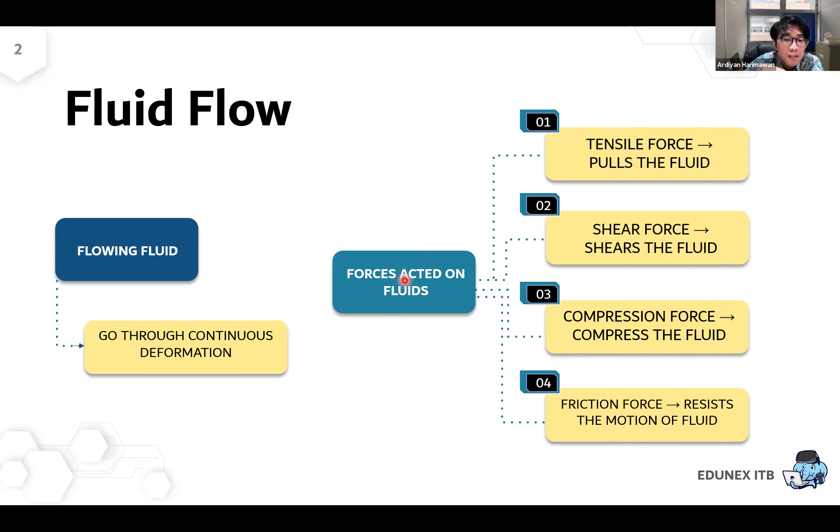For example, near the inside wall of the pipe, the fluid will give resistance - this resistance is called the friction force. So if these first three types of force cause the fluid to flow, the last type of force will resist the motion of the fluid. This is the types of forces that act on the fluid, causing continuous deformation.

Depending on the velocity, the fluid will undergo different types of flow, or flow regime - berdasarkan kecepatan akan ada yang namanya rejim aliran atau jenis aliran. The extreme one, the slowest one, because of very low velocity, the flow regime will be laminar flow. On the opposite, if the velocity is very, very high, the flow regime will be turbulent flow.

The characteristics of laminar and turbulent flow we have discussed in our previous class. And this is an important parameter that we will often encounter when dealing with fluid mechanics calculations - we call it Reynolds number.

Reynolds number is basically a ratio, a comparison - there will be no units for Reynolds number. It's the comparison between the inertial force, the force causing the fluid to flow - the higher the inertial force, the higher the continuous deformation - divided by the viscous force due to viscosity, which is the force that resists or goes against the fluid flow.

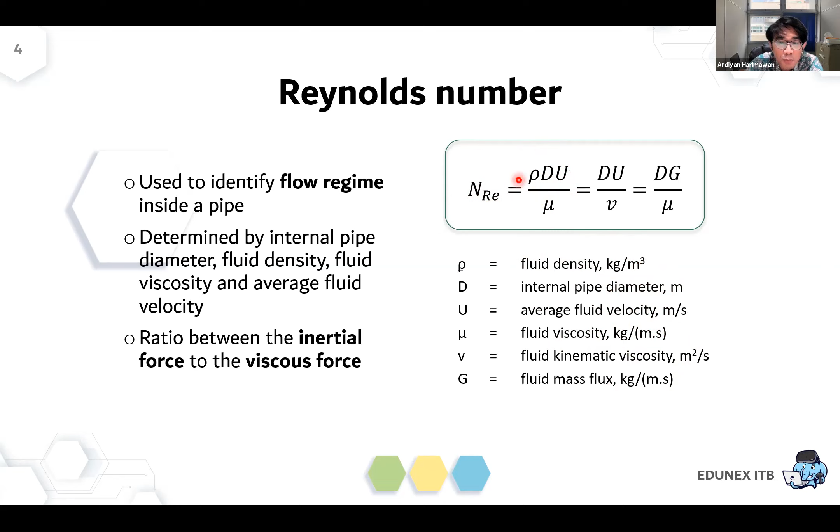By calculating the Reynolds number, we can classify the flow regime. If the Reynolds number is quite small, the flow regime will be laminar. Vice versa, if the Reynolds number is quite high, the flow regime will be turbulent, and in between we call it transition regime.

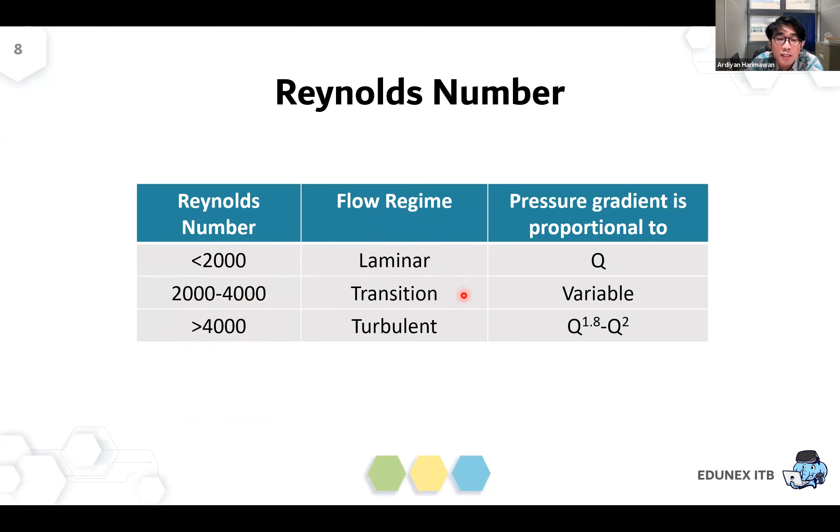Okay, we have discussed what is the application, but later we will discuss this further. On our previous class, we have also discussed, especially for liquid, that if the liquid is flowing in the pipeline, depending on the size of the pipeline and depending also on the velocity of the fluid, the volumetric flow rate, it might not fully fill the pipeline.

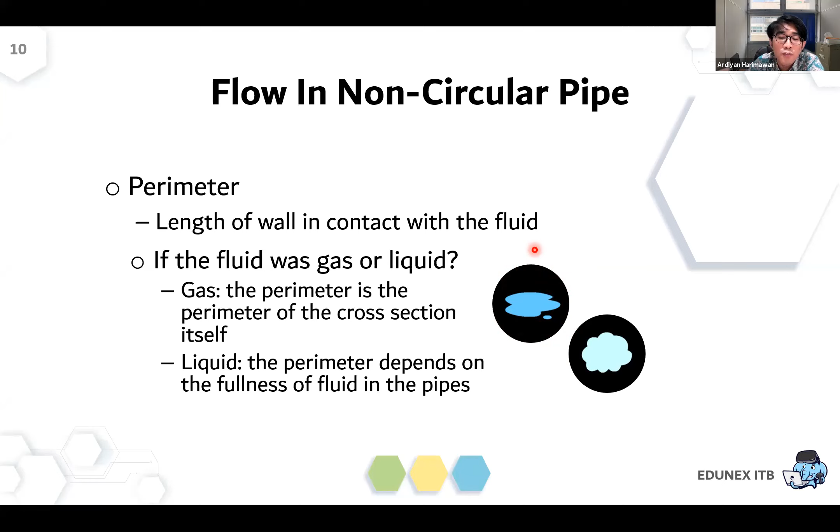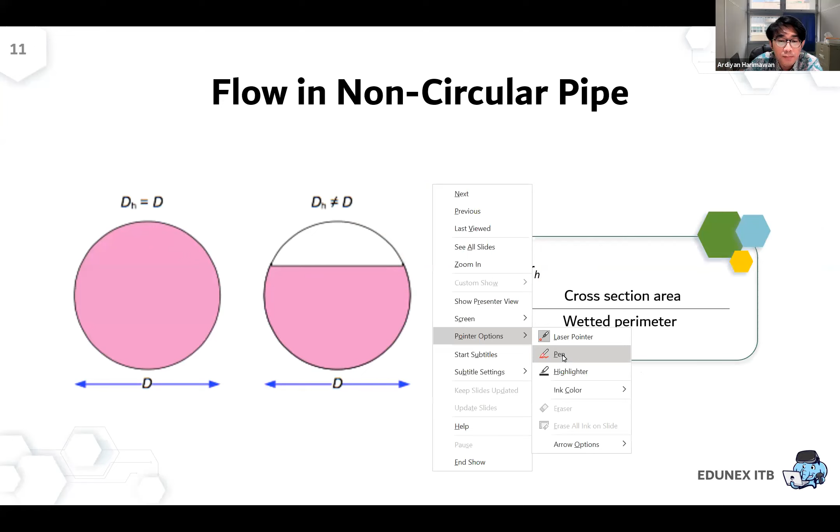So in the case when the fluid is not fully filling the pipeline, you need to determine what we call equivalent diameters or hydraulic diameters. It will be 4 times the hydraulic radius, a bit different from the concept of diameter and the correlation between diameter and radius you've known before, where diameter is simply 2 times radius. But for hydraulic diameter, it will be 4 times. And what will be the definition of hydraulic radius? It will be the cross-sectional area divided by the wetted perimeter.

The wetted perimeter is the part of the cross-section that will be in contact with the liquid.

It will depend on the cross-sectional shape of the pipeline and how much the liquid fills the pipeline.

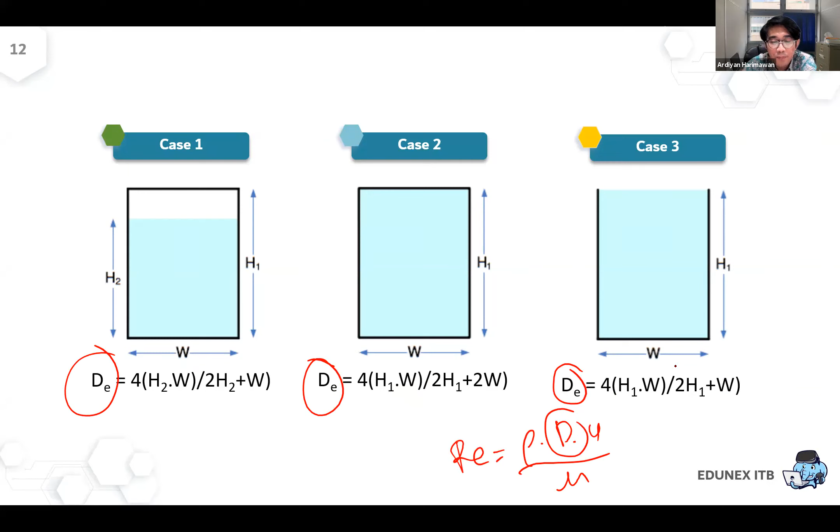Okay, previously I told about the wall thickness. So when you buy a pipe or tubing, a smaller pipe, namely tubing, basically the size is not something the equipment or the thing you customize by yourself.

During building a chemical plant, when you need to flow the liquid or gas, flow the raw materials, you need to buy a pipe, right? You need to install a piping system. And when you buy a pipe, it's not customized. It means certain types of materials will have certain standard pipe sizes.

So pipes in general, you don't just order by saying you want a pipe of a certain diameter and have it custom made. No. Based on the materials, depending on the materials, they will come in certain sizes, called the nominal pipe size. So when you buy a pipe, they will ask what size, 1.5, 2, or 3? That represents the nominal pipe size in inches. So the unit will be inches.

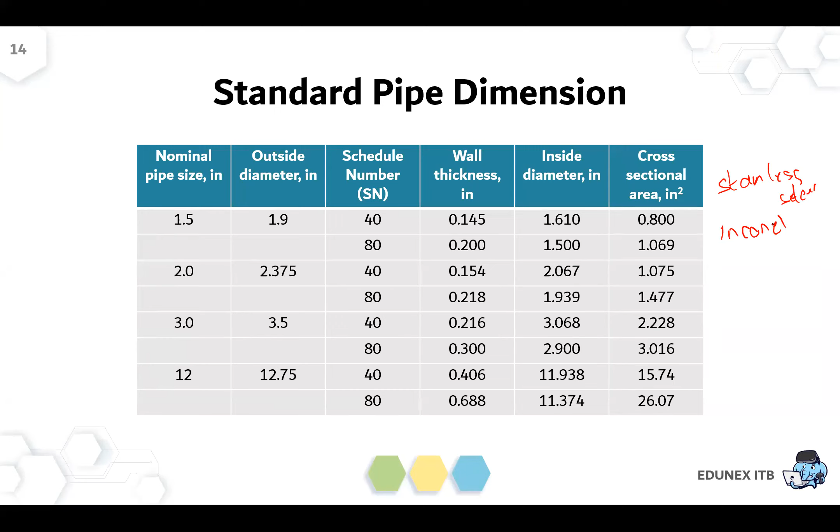Okay, besides that, maybe from other students, is it always made of metal? This is types of steel, right? PVC, sir? Yes, that's a common type of material, right? Polyvinyl chloride. And then it can also be made from concrete. Metals, yeah, it's not only steel, but sometimes it's made from copper as well.

So the outside diameters will depend on the nominal size and also on the material of the pipe. But the common rule is the higher the schedule number, the higher the wall thickness. It means it will have smaller inside diameters, and so on.

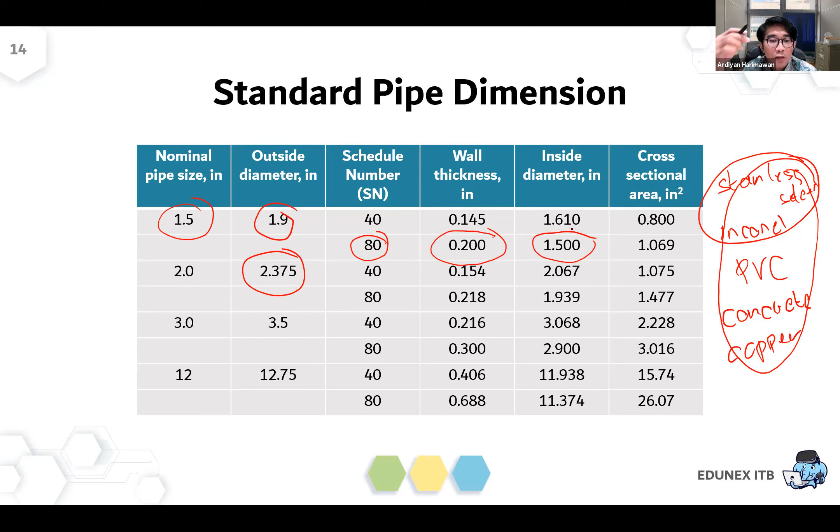You can find these tables from the handbook or the equipment or the pipe specification sheet.

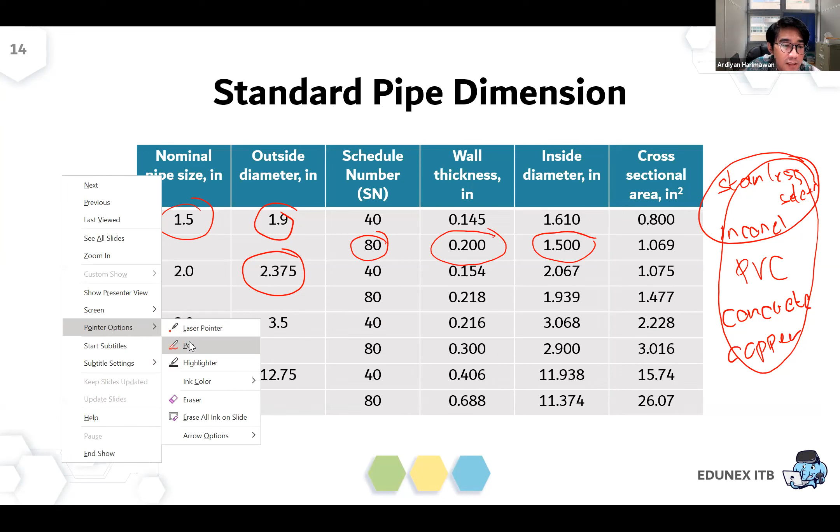This case is for carbon steel, right? Carbon steel or stainless steel will have different schedule numbers.

For each schedule number, you can check from this table how much is the wall thickness and how much will be the inside diameter. Don't forget to calculate inside diameter. If you only have the outside diameter and wall thickness, inside diameter will be outside diameter minus 2 times wall thickness.

Because it's diameter, not radius. So the inner diameter will be the outside diameter minus 2 times the thickness.

So inside diameter will be the value that you need to use to calculate the Reynolds number. In general, when you do the calculation of Reynolds number, you need the value of diameter, so this will be using the inside diameter.

Except for the case of the annulus that we discussed before, for the smaller tube, you need the value of outside diameter.

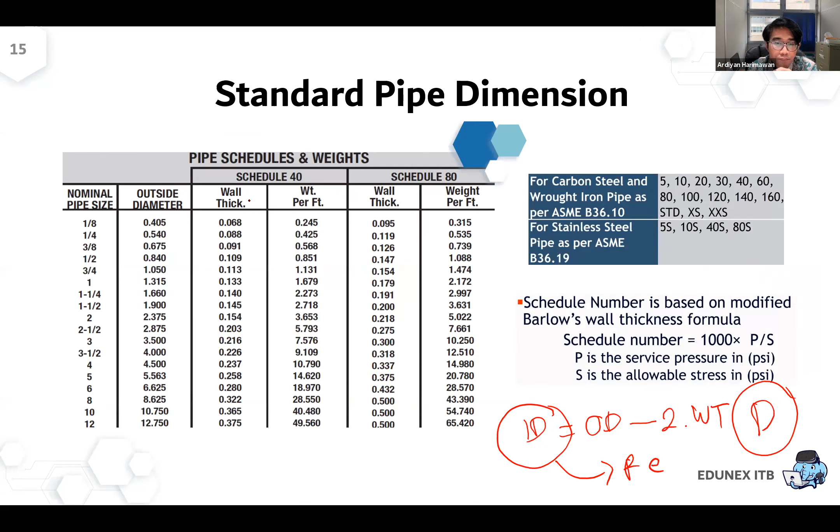Okay, then I will continue to the next part of the lecture, where we will discuss mass balance in fluid flow.

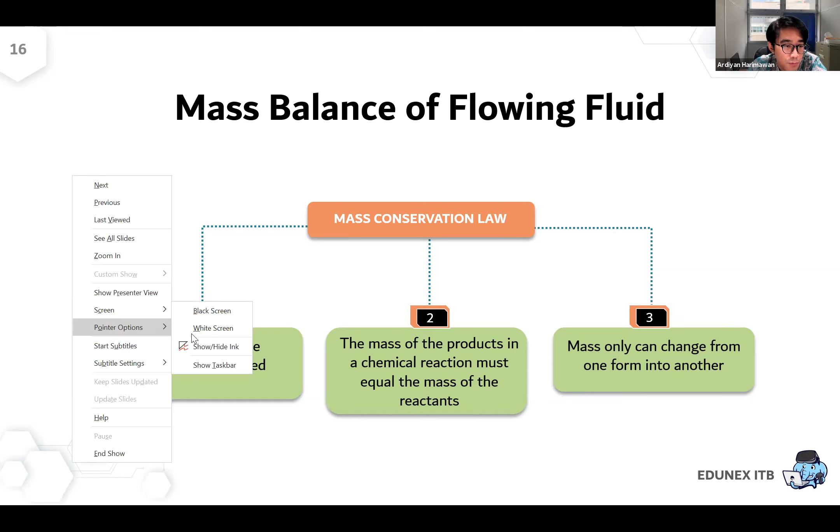I think you already, in third semester, study mass and energy balance, the same semester as fluid mechanics, right? So can you tell me the general equation of mass balance?

Is it input equals to output, sir? That's the very simplified one.

The general one, accumulation will be... anyone know?

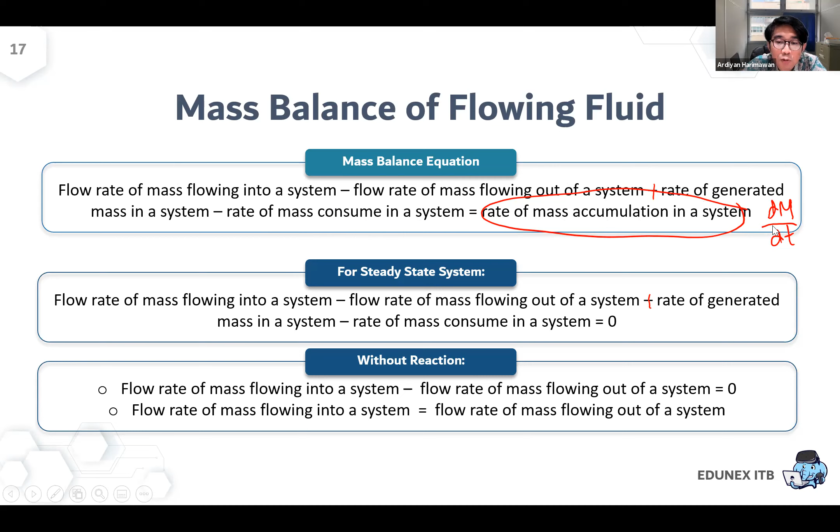The more ideal condition is called steady state. Have you learned this term in mass and energy balance class? Steady state? Have you or have you not?

I think, sir, maybe in another class too, not mass balance. I mean, in your class? I think you are all in the same class, right, in mass and energy balance. Yes, sir. Have you learned about steady state?

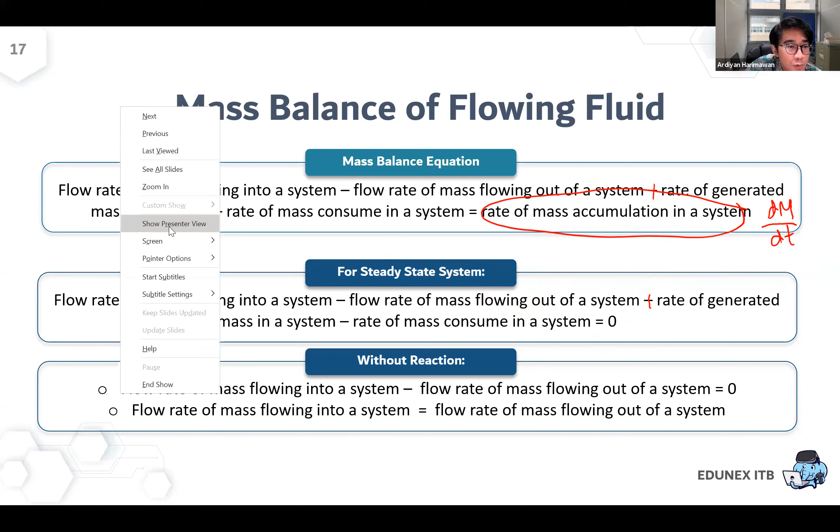So when there is no accumulation in the system, there is no dm over dt, we call it steady state system. Atau kita sebutnya tunak kalau bahasa Indonesia. Jadi kondisi steady state system means no accumulation. So the rate of accumulation will be 0. This one equals 0, we call it no accumulation. Steady state means no accumulation.

For the simpler case, to simplify it even more, the case of flowing fluid, there will be no reaction, right? If just water flowing inside the pipe, there will be no reaction. So it means rate of generated mass in the system will equal 0. And then rate of mass consumed in the system will equal 0 as well.

So the component of mass balance of flowing fluid is only flow rate of mass flowing into the system and flow rate of mass flowing out of the system. Ya, jadi di kasus fluida mengalir karena tidak ada reaksi, kemudian kondisinya dianggap steady state, tidak ada akumulasi, maka komponennya tinggal input dan output saja. And there, it will be equals 0. That's why input will be equals to output.

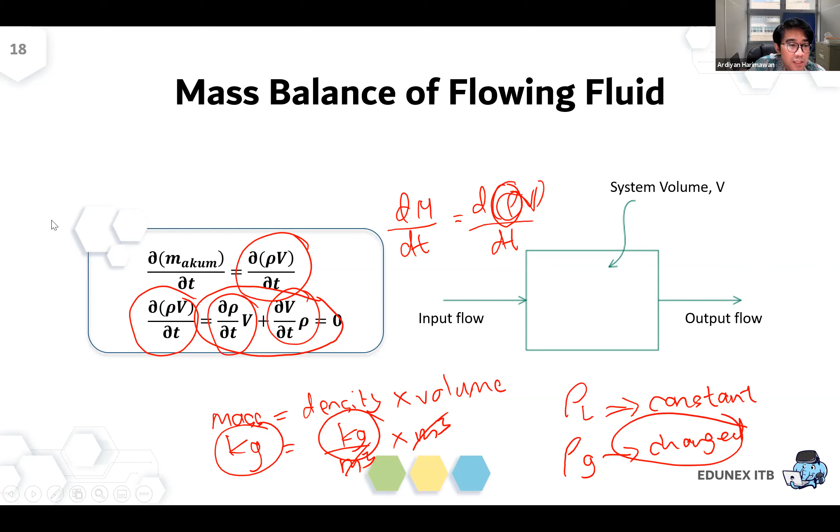And if the rate of accumulation is 0, ya, ketika akumulasinya sama dengan 0, ya, bagian ini sama dengan 0. Later, we will use this equation when we deal with compressible fluid. Gas is compressible, so the density is not constant. So we will deal with this equation more when we discuss about compressible fluid. But for liquid, the incompressible, just assume dm per dt, and then in steady state condition, it will be 0. Input will be the same as output.

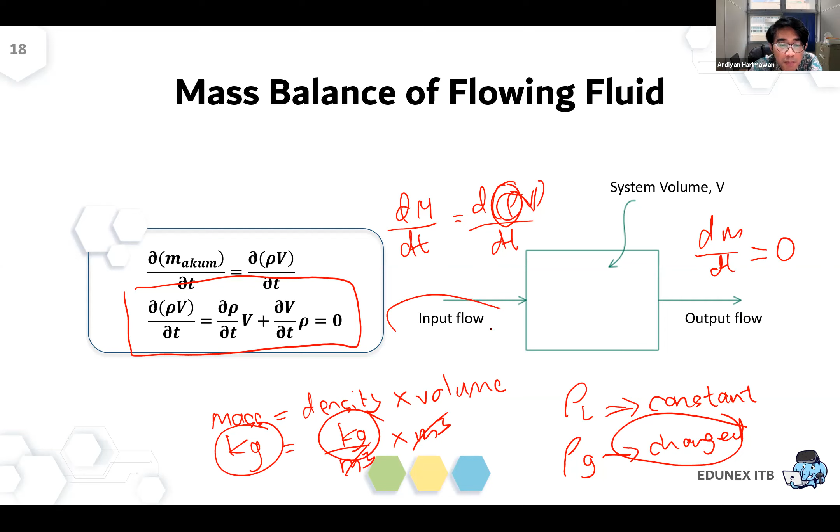Okay, so for example, liquid is flowing to the pipe with this kind of arrangement. This is the inlet cross-sectional area, A1, and this is the second one, the outlet, A2. So it will flow from point 1 and comes out from point 2. Based on the equation or the mass balance that we have discussed before, since the condition is steady state, input will be the same as output, right? So this is the steady state mass balance. The mass flow rate at the inlet will be the same as mass flow rate at the outlet.

Mass, tadi massa apa? Densitas kali volume. This one will be cross-sectional area times velocity. Ya, ini kilogram over cubic meters.

Sorry, this is cubic meters. This is cross-sectional area, U is linear velocity. So this one should be like this. This one is kilogram per second, and this one is cubic meter per second. So the equation becomes this one. In this equation, rho times A times U, the unit will be kilogram per second, or mass over time. As the input will be equal output, then this multiplication at point 1 will be the same as this multiplication at point 2. It will be constant, and we call it equation of continuity.

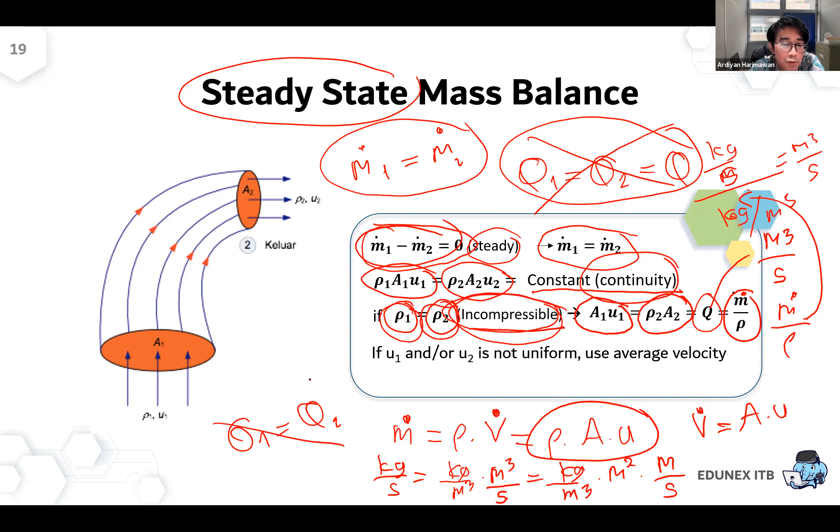Okay, I think this one is not. Don't be intimidated again with the equation. However, you need to understand that when the liquid or gas is flowing into the pipe arrangement, it might not have similar diameters. Then the pipe might not have the same height related to the baseline.

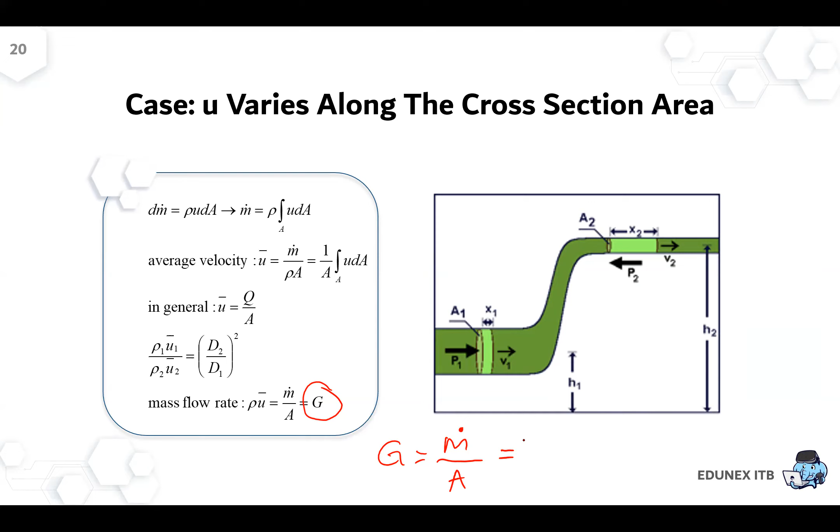Mass flow rate is expressed in kilograms per second. How about the area? Cross-sectional area, meter squared.

So sometimes mass flow rate is expressed in these parameters: mass over time over area. This one we call mass flux. Please try to memorize. Flux is basically flow rate.

Rate means, if you've heard terms like heart rate, flow rate, it depends on time, right? So mass flow rate, kilogram per second, divided by area, we call it mass flux. So this one is basically flux, mass flow rate divided by area.

It means mass flux will not always be constant, right? Because what's constant is mass per time, or mass itself - that will always be constant. But the area can be not constant. Because the area can be not constant, the velocity is not constant. Because area can be not constant, mass flux is also not constant.

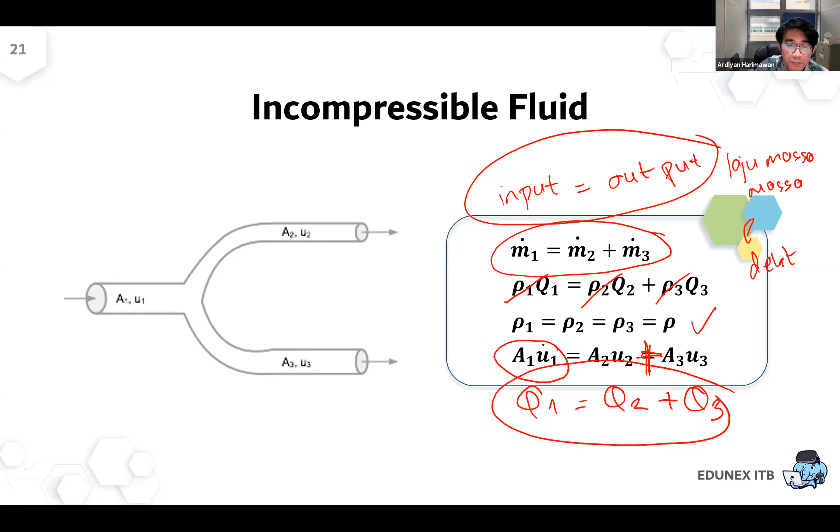Okay, I think we will have 5 minutes, 10 minutes exercise. Please check your slide, but I will make some corrections first.

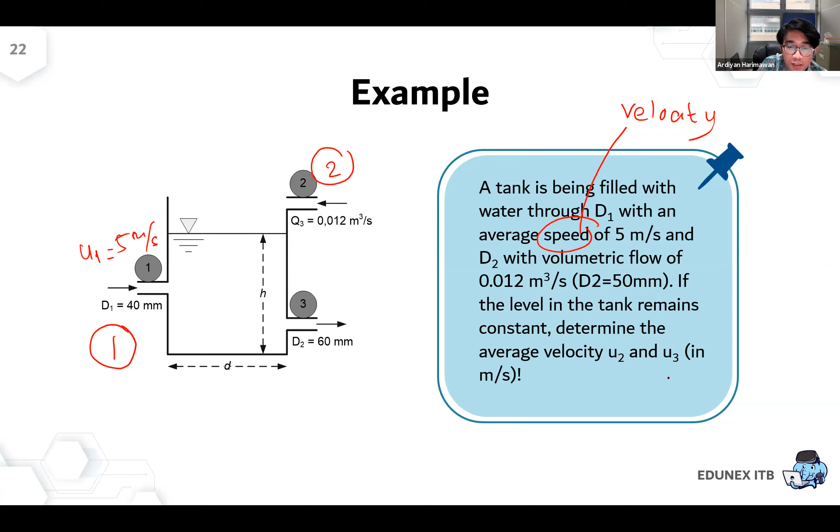So a tank is being filled with water through D1, here, with the average speed being the velocity. At this point, the velocity will be 5 meters per second. And D2, this one, with the volumetric flow rate 0.012 - so this is Q2.

And the diameter will be 50 millimeters. Okay, if the level in the tank remains constant - this one constant - please calculate the velocity at point 2, and this is D3, and the velocity at point 3.

What does it mean for the height to be constant? What is the meaning of the level in the tank remaining constant? Zero accumulation - zero accumulation, correct.

And then it will be achieved by relating these three flows. A student suggests constant rate. Yeah, can you speak louder please? Constant flow rate.

Constant flow rate? What do you mean by constant flow rate? Like it does not change, so it keeps being the same. Please rephrase again. So it's like it's going in at the same rate at different times.

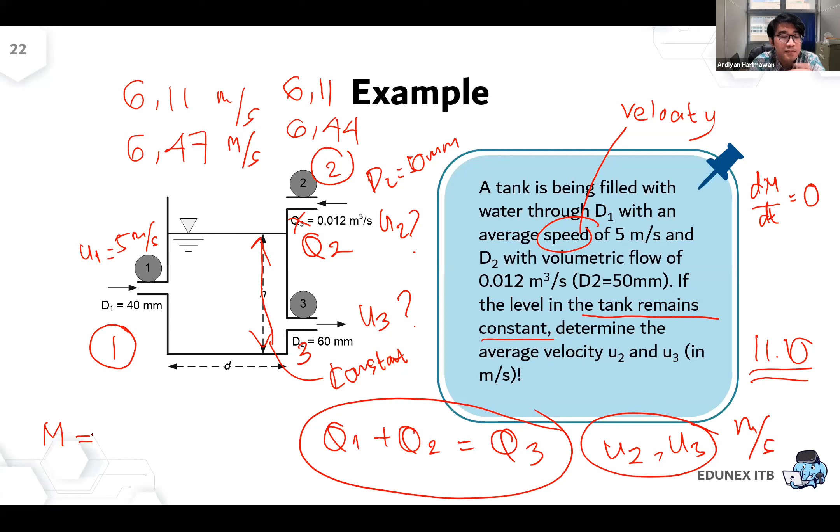What is m in this part? Mass. How to calculate mass if you have a tank? Should I ask?

Okay, who hasn't been asked yet? Okay, Jilan, are you there? Yes, sir. How to calculate mass if you have a tank with diameter D and height H?

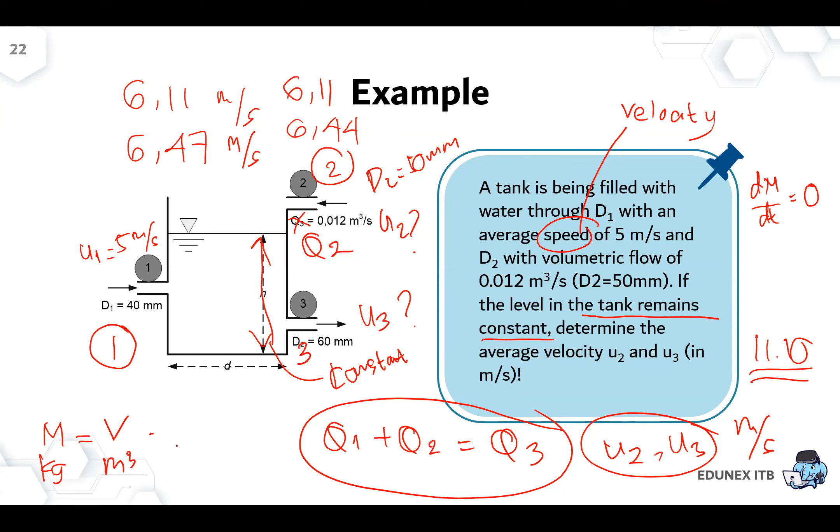Volume times... mass is kilogram, right? This is times the density. Correct, so you need to know the value of the density.

If water, then you can just use 1 kilogram per liter or 1000 kilogram per cubic meter. Then for volume, you can get the correlation of the cylindrical volume: quarter times pi D squared times height.

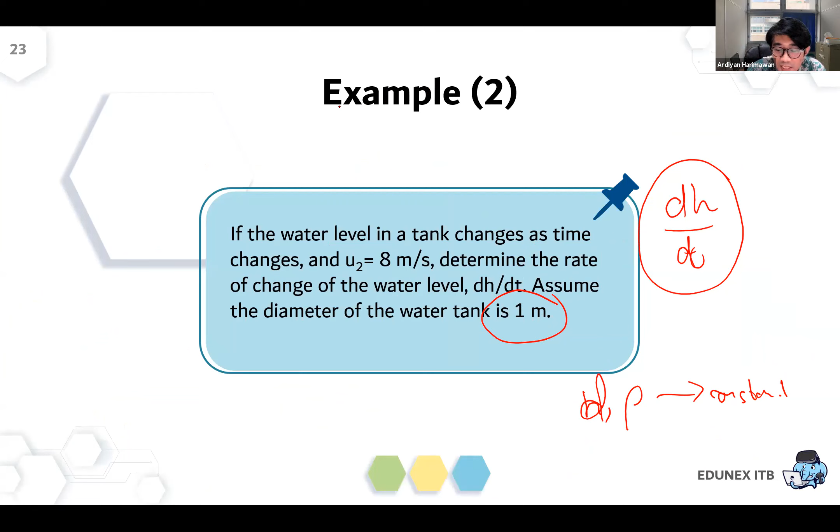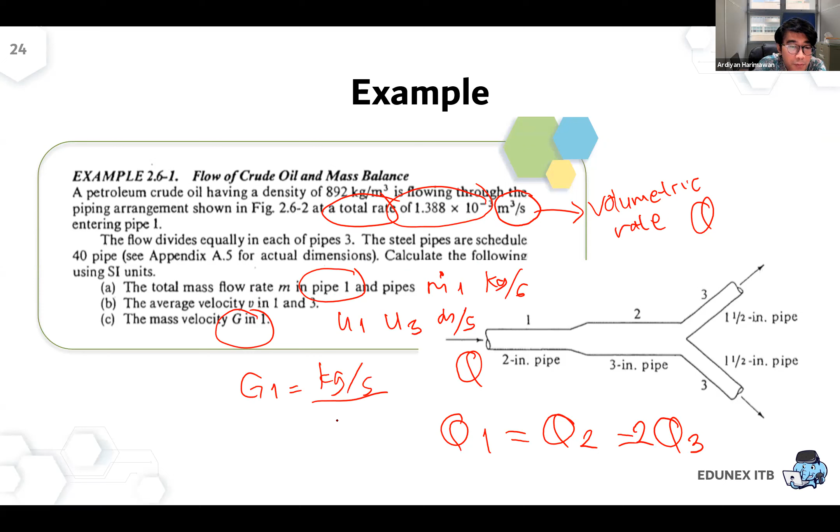Yeah, so you can check, you can try to do the calculation first, and you already have the solution here, then you can check. First, you need to convert the nominal size into the actual size. For example, for 2-inch nominal size with schedule 40, the inside diameter will be 2.067 inch. Then you need to convert to square meter. You can do the same for the second diameter and the third diameter.

And the total mass flow rate is just the volumetric flow rate times density. You get the mass flow rate. Mass flow rate will be volumetric flow rate times density.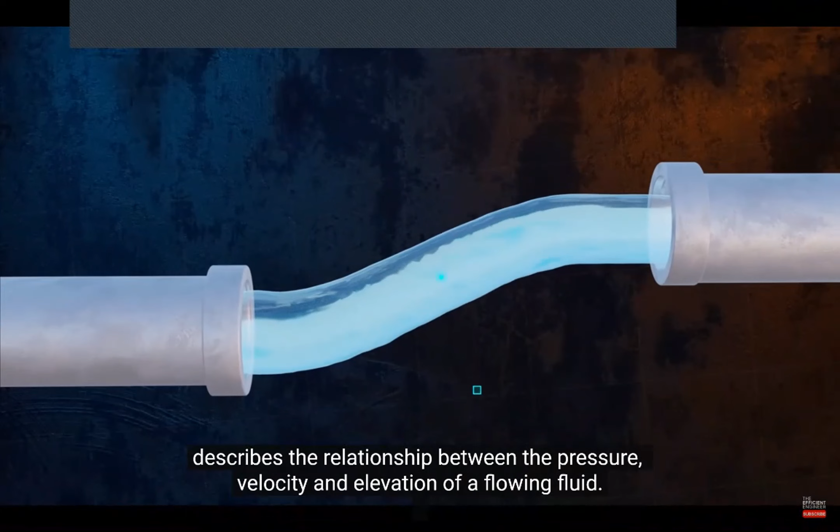Bernoulli's equation is a simple but incredibly important equation in physics and engineering that can help us understand a lot about the flow of fluids in the world around us. It essentially describes the relationship between the pressure, velocity, and elevation of a flowing fluid. It has countless applications. We can use it to explain how planes generate lift, or to calculate how fast liquid will drain from a container, for example. We'll explore these applications and a few more later on, but let's start by reviewing the equation itself. It was first published by the Swiss physicist Daniel Bernoulli in 1738, and it looks like this.

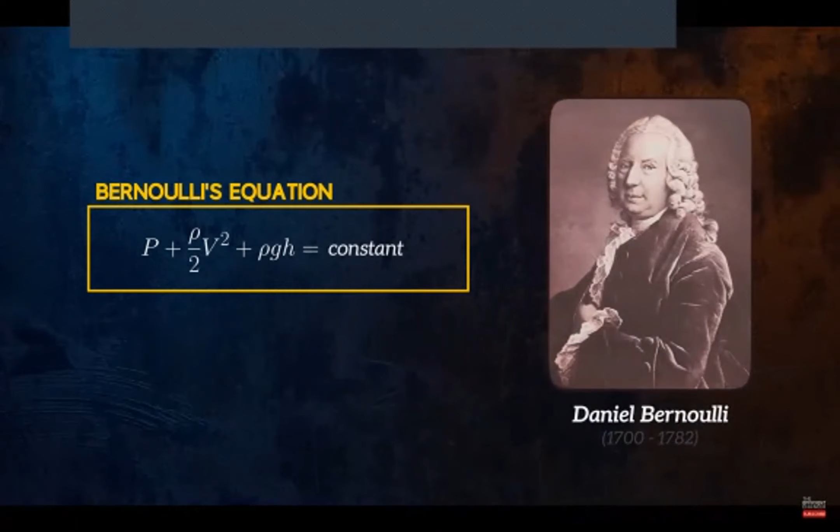The equation states that the sum of these three terms remains constant along a streamline. Each of the terms is a pressure. The first term is the static pressure, which is just the pressure P of the fluid.

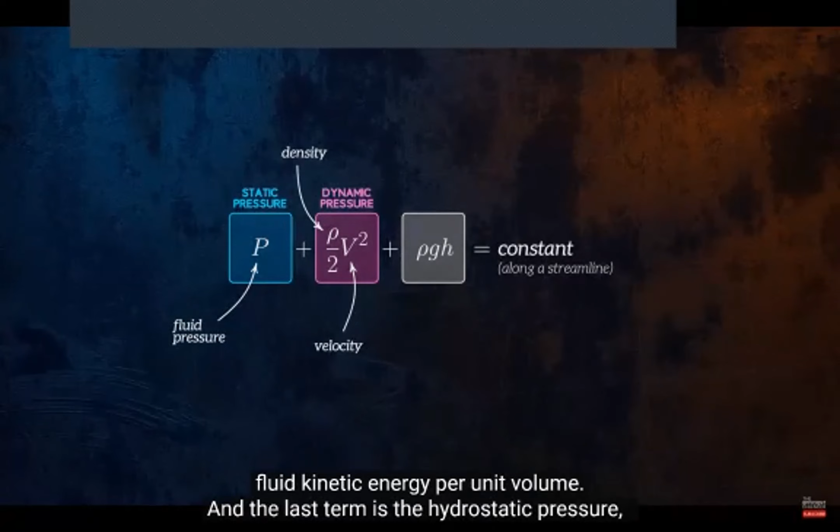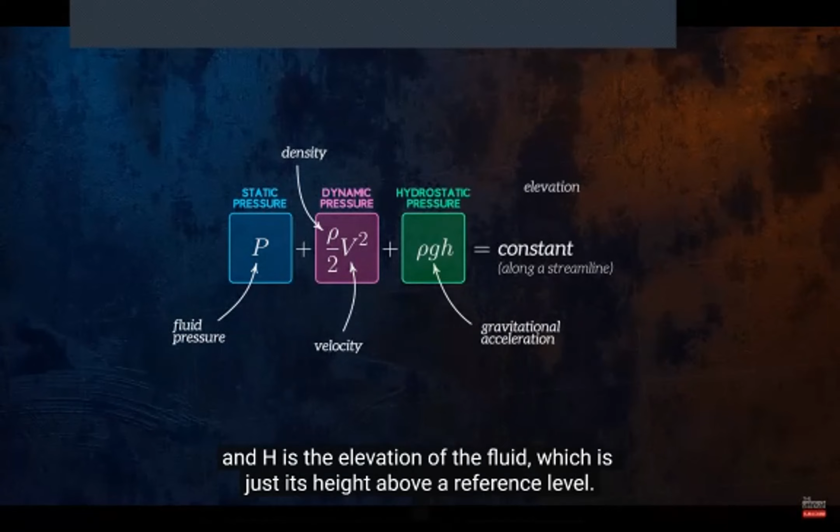Then we have the dynamic pressure, which is a function of the fluid density, ρ, and velocity, v, and represents the fluid kinetic energy per unit volume. And the last term is the hydrostatic pressure, which is the pressure exerted by the fluid due to gravity. G is gravitational acceleration, and h is the elevation of the fluid, which is just its height above a reference level.

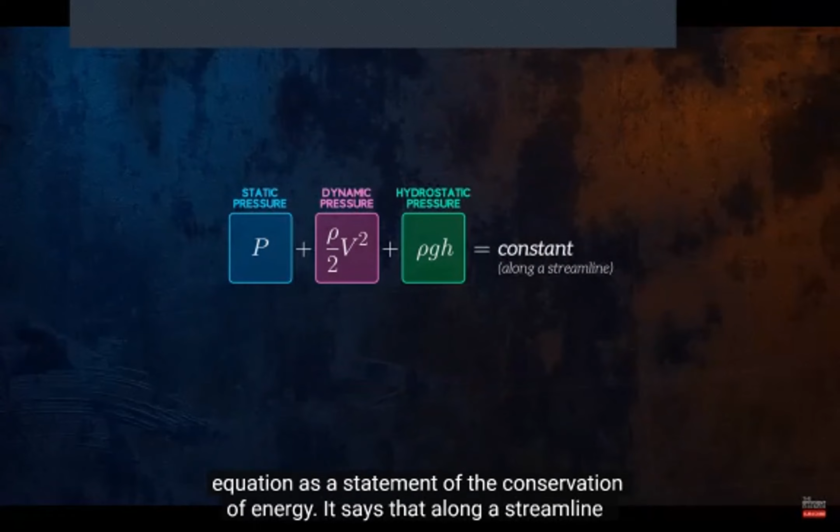This is the pressure form of the equation, but it can also be presented in the head form and the energy form. We can think of Bernoulli's equation as a statement of the conservation of energy. It says that along a streamline, the sum of the pressure energy, kinetic energy, and potential energy remains constant. This is really valuable information that can help us analyze a whole range of fluid flow problems.

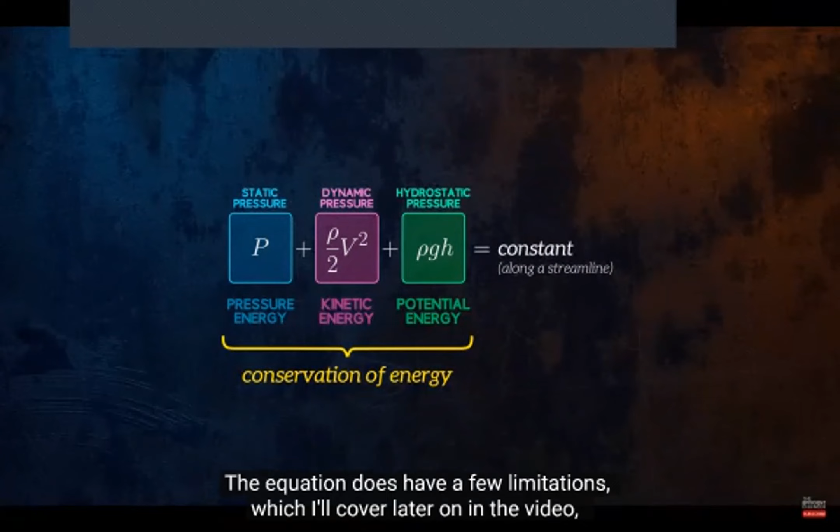The equation does have a few limitations, which I'll cover later on in the video. But for now, the important thing to note is that it can only be applied along a streamline. We can define a streamline in steady flow as the path traced by a single particle within the fluid, or more technically, as a curve that at all points is tangent to the particle velocity vector.

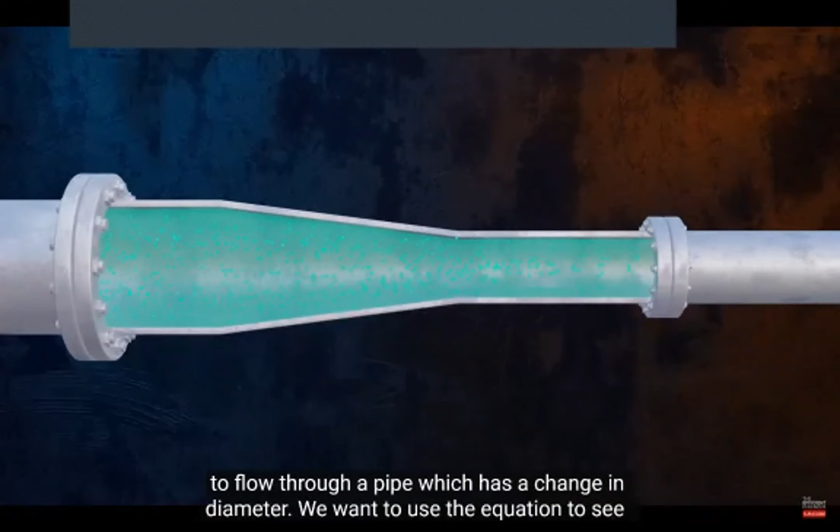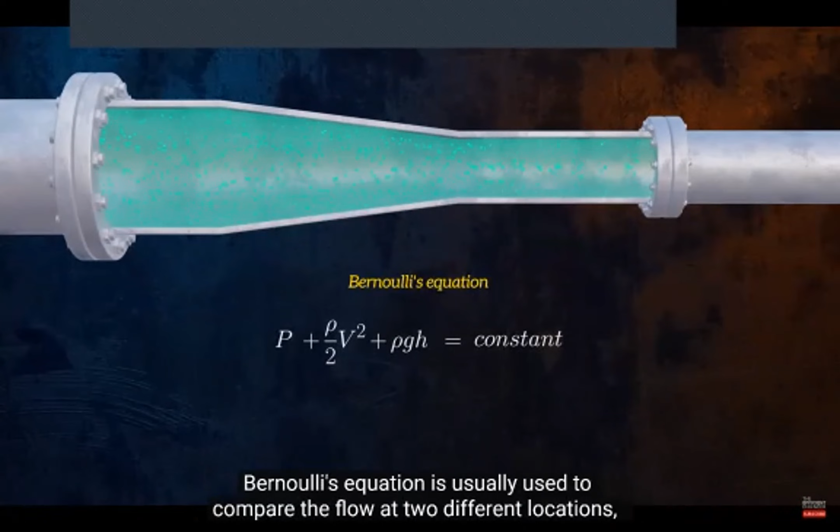Let's look at an example where we apply Bernoulli's equation to flow through a pipe which has a change in diameter. We want to use the equation to see how the pressure changes as the flow passes from the larger to the smaller diameter. Bernoulli's equation is usually used to compare the flow at two different locations, so we can rewrite it like this, with points 1 and 2 both being on the same streamline.

There's no significant change in elevation between points 1 and 2, so the potential energy terms cancel each other out. And if we put all of the static pressure terms on one side, we get this equation for the change in pressure.

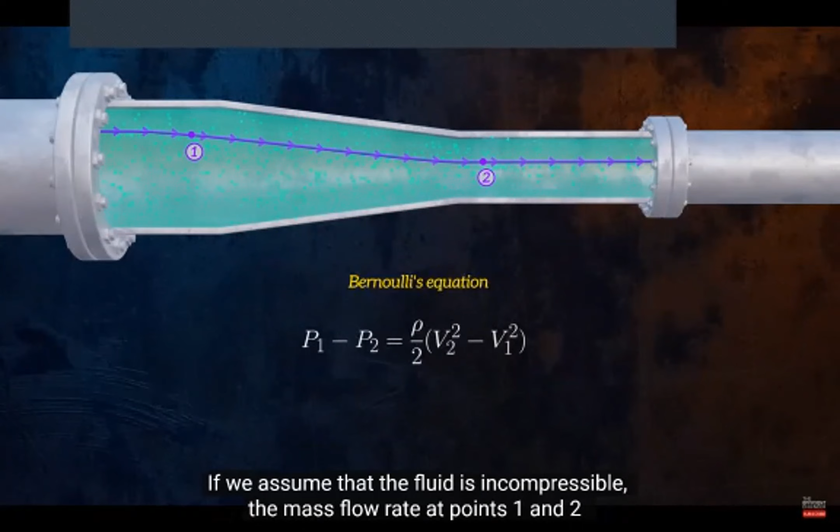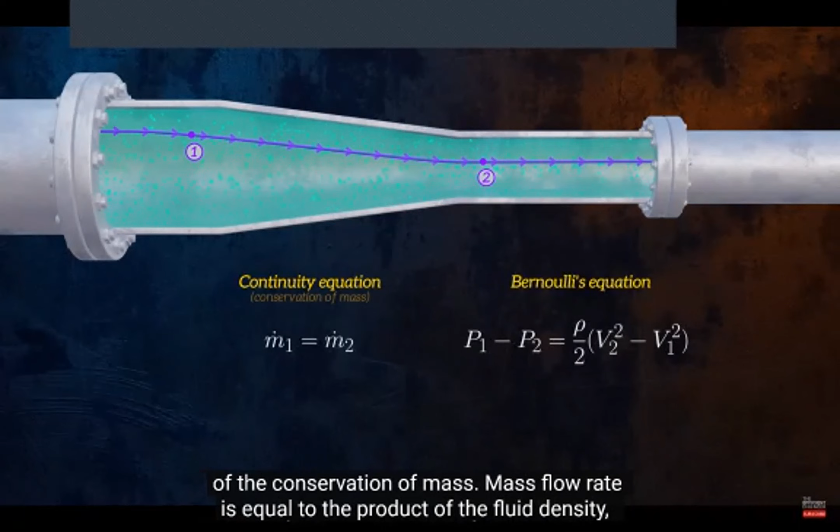If we assume that the fluid is incompressible, the mass flow rate at points 1 and 2 must be equal. This gives us what's called the continuity equation, which is just a statement of the conservation of mass. Mass flow rate is equal to the product of the fluid density, the pipe cross-sectional area, and the fluid velocity.

So we can rearrange the continuity equation to obtain an equation for the velocity at point 2. The cross-sectional area, A2, is smaller than A1, which means that the velocity of the flow increases as it passes into the smaller diameter pipe.

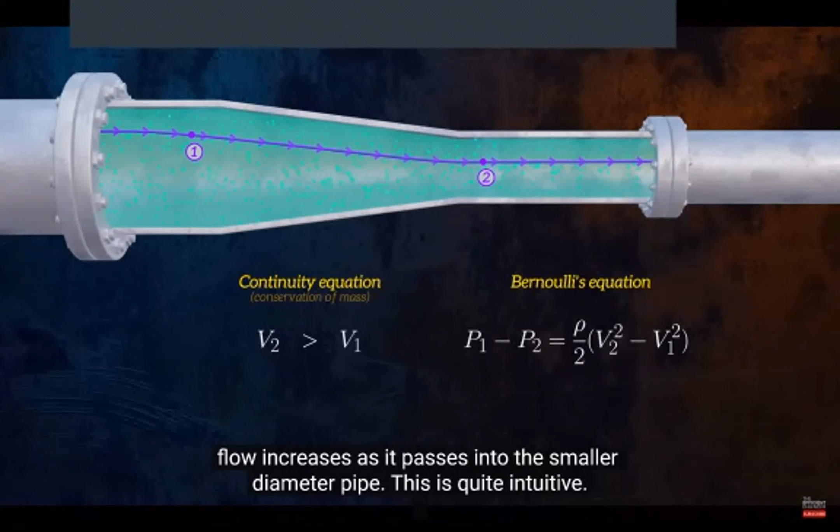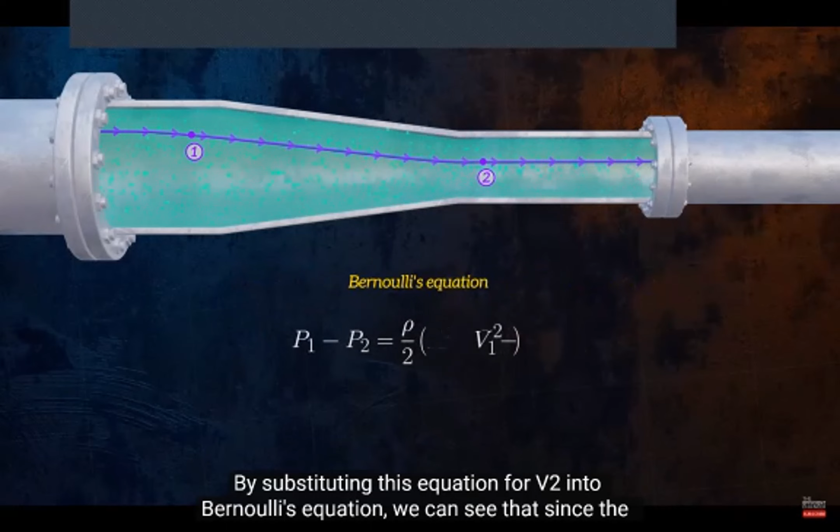This is quite intuitive. By substituting this equation for V2 into Bernoulli's equation, we can see that since the velocity increases between points 1 and 2, the pressure between both points must decrease.

This concept that for horizontal flow an increase in fluid velocity must be accompanied by a decrease in pressure is one way of formulating what we call Bernoulli's principle. It can seem counterintuitive because people often expect an increase in velocity to result in a corresponding increase in pressure, but it makes sense if we think about the conservation of energy. The energy required to increase the fluid velocity comes at the expense of the static pressure energy.

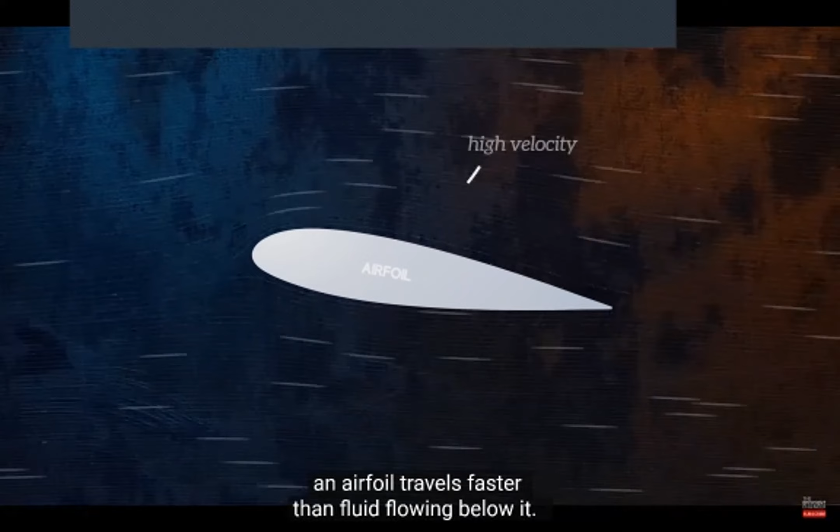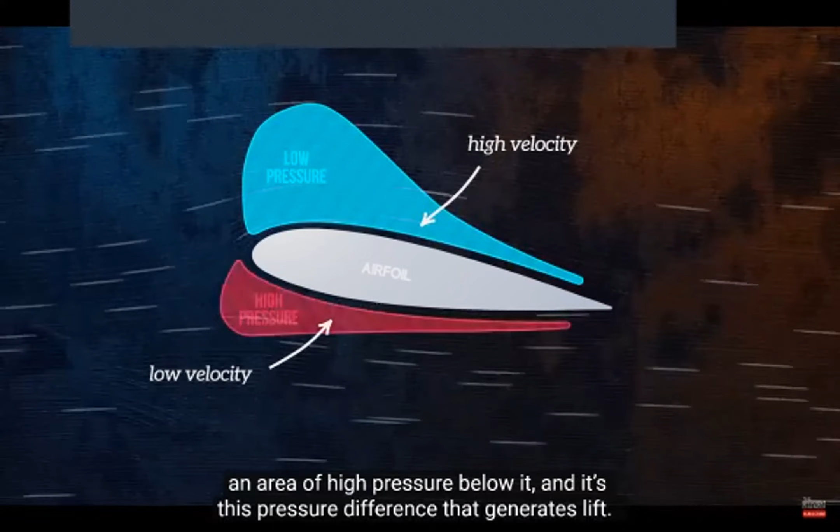Bernoulli's principle shows up in a lot of different places. We can use it to help explain how plane wings generate lift. Fluid flowing over an airfoil travels faster than fluid flowing below it. According to Bernoulli's principle, this creates an area of low pressure above the airfoil and an area of high pressure below it. And it's this pressure difference that generates lift. I'll cover lift and drag forces in more detail in a separate video.

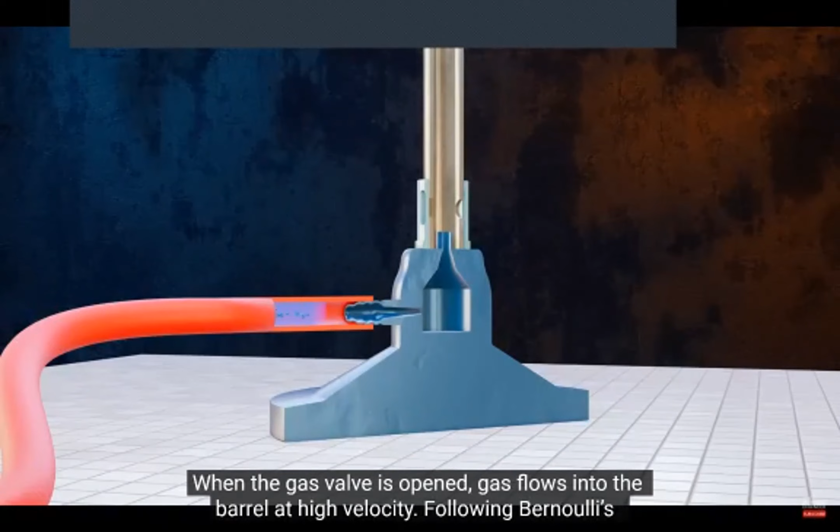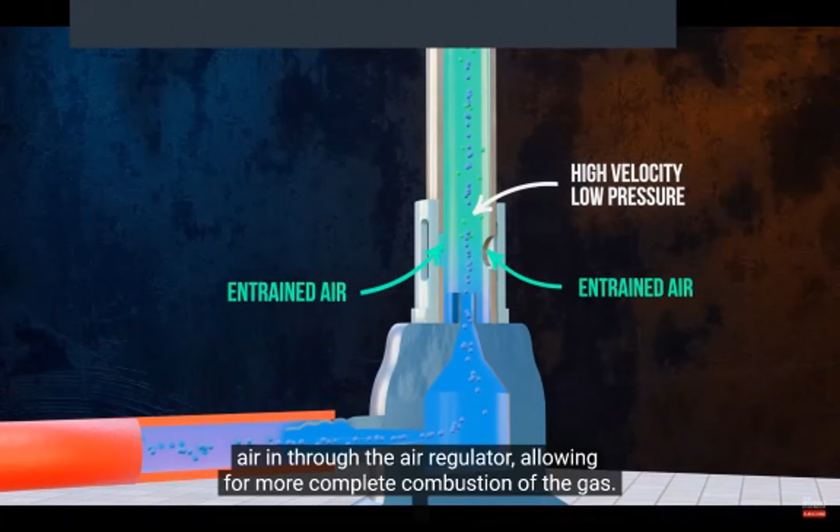Bernoulli's principle also explains how Bunsen burners work. When the gas valve is opened, gas flows into the barrel at high velocity. Following Bernoulli's principle, this high velocity creates an area of low pressure in the barrel, which draws air in through the air regulator, allowing for more complete combustion of the gas.

Several different flow measurement devices rely on Bernoulli's equation to determine the velocity of a flowing fluid. The pitot static tube is one such device. It's often used in aircraft to measure airspeed.

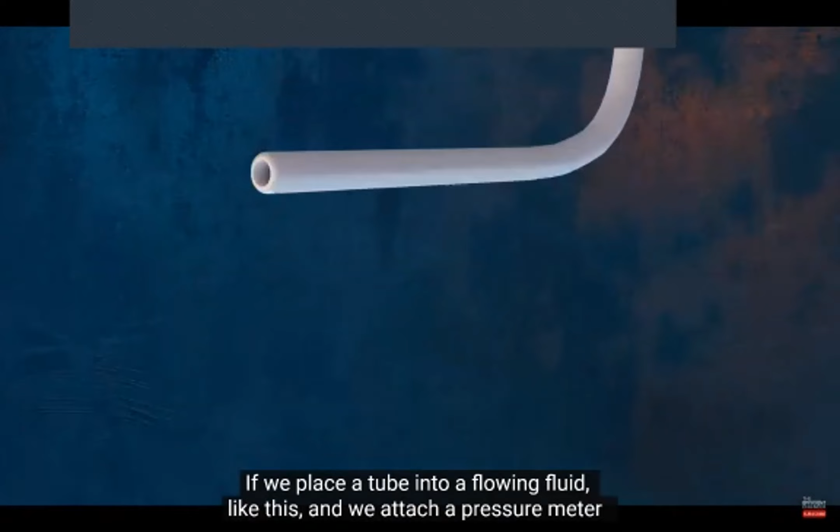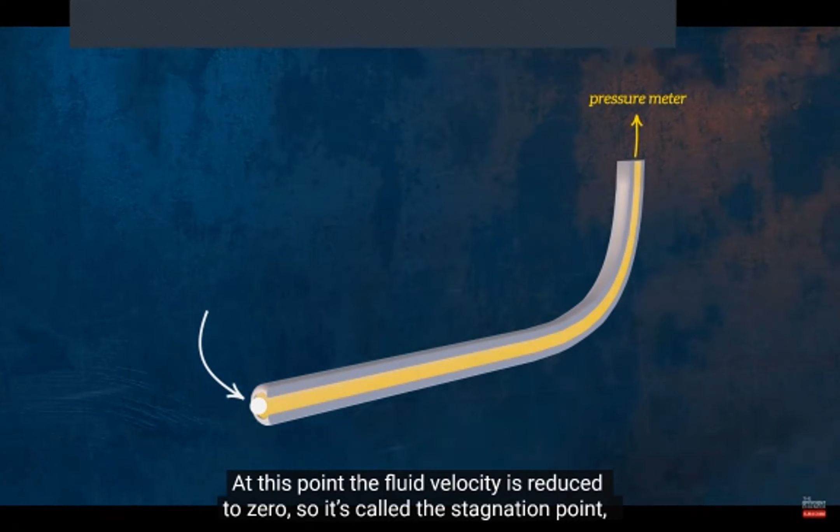Here's how it works. If we place a tube into a flowing fluid, like this, and we attach a pressure meter to the end of it, the meter will measure the pressure at the end of the tube. At this point, the fluid velocity is reduced to zero, so it's called the stagnation point, and the pressure measured by the meter is called the stagnation pressure.

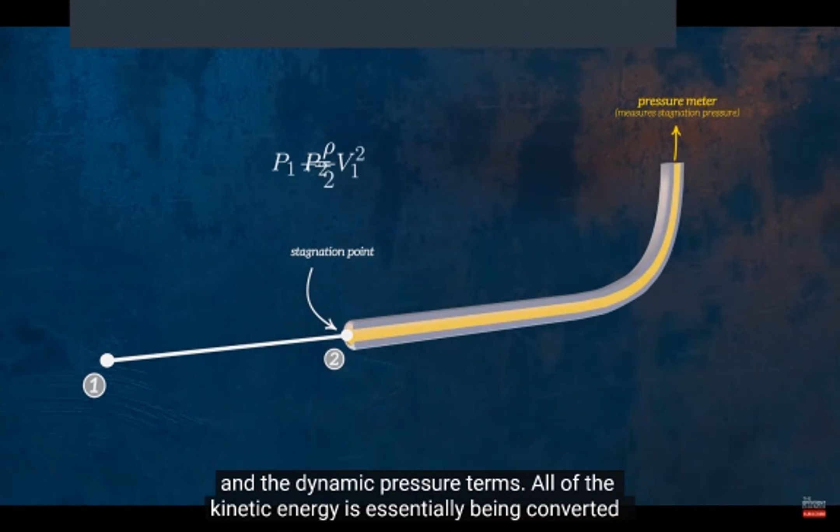We can apply Bernoulli's equation between an upstream point and the stagnation point, and show that the stagnation pressure is equal to the sum of the static pressure and the dynamic pressure terms. All of the kinetic energy is essentially being converted into pressure energy at the stagnation point.

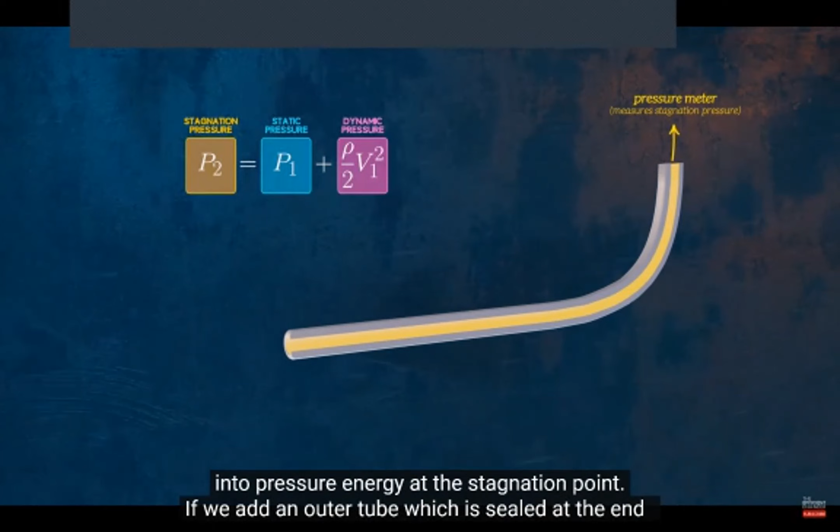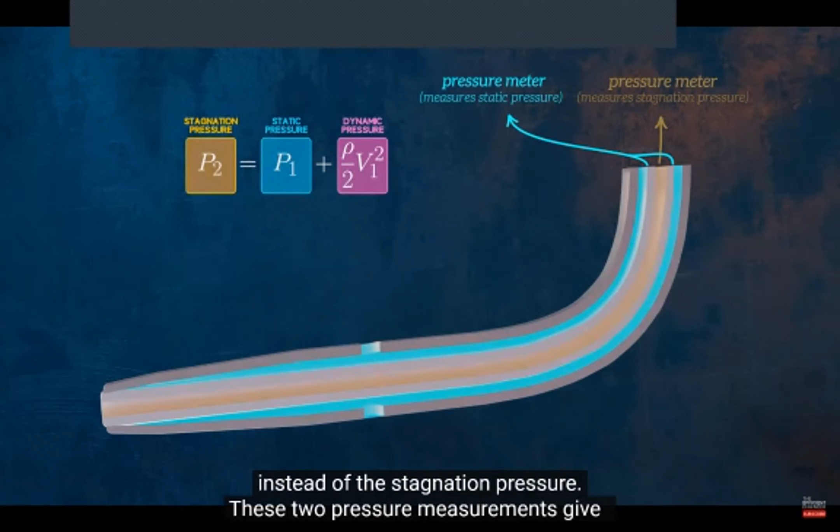If we add an outer tube which is sealed at the end but has holes further downstream, the outer tube will measure the static pressure of the fluid instead of the stagnation pressure. These two pressure measurements give us all of the information we need to determine the velocity of the flow.

Another flow measurement device that uses Bernoulli's equation is the Venturi Meter, which is an instrument used to determine the flow rate through a pipe. It works by measuring the pressure drop across a converging section of pipe.

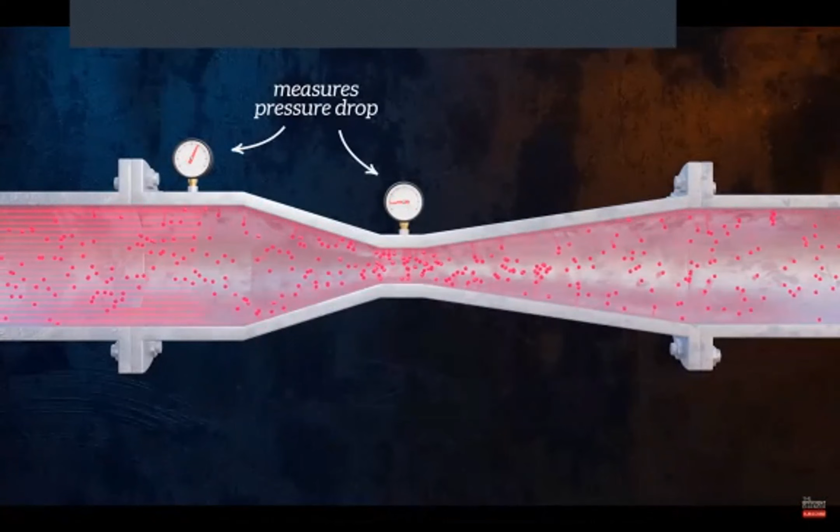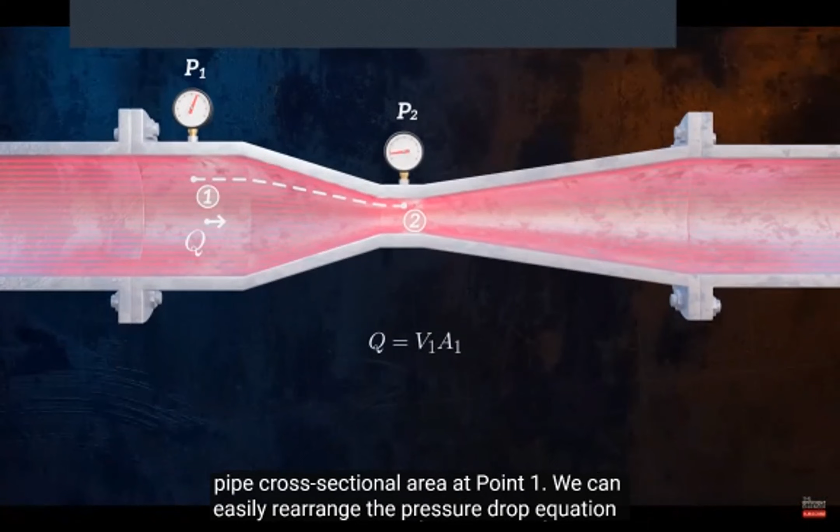Say we want to determine the flow rate, Q, which is the velocity multiplied by the pipe cross-sectional area at point 1. We can easily rearrange the pressure drop equation we derived earlier when we looked at a change in diameter to get this equation for flow rate. All we need to know is the dimensions of the Venturi meter, the fluid density, and the pressures P1 and P2, and that allows us to calculate the flow rate.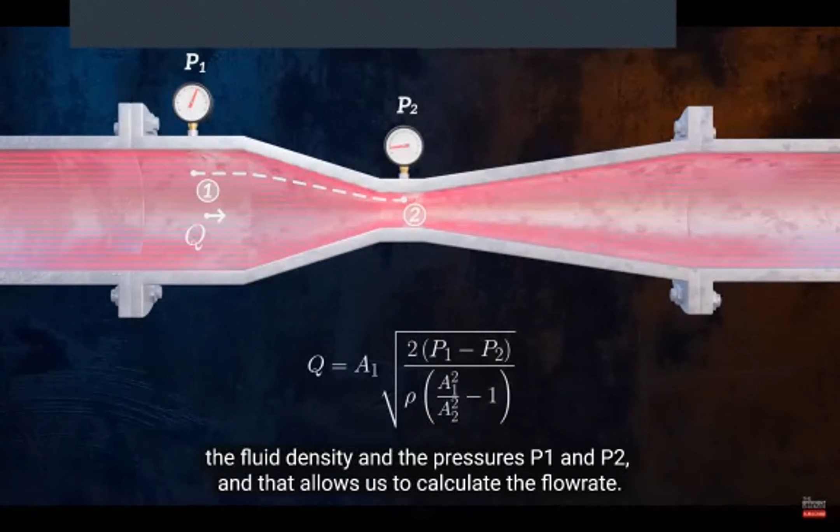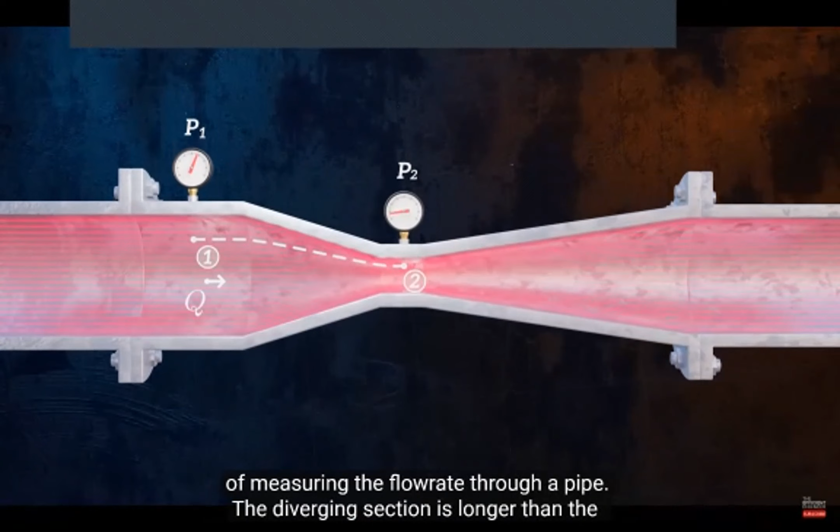The Venturi meter has no moving parts and is a very simple and reliable way of measuring the flow rate through a pipe. The diverging section is longer than the converging section to reduce the likelihood of flow separation and keep energy losses low.

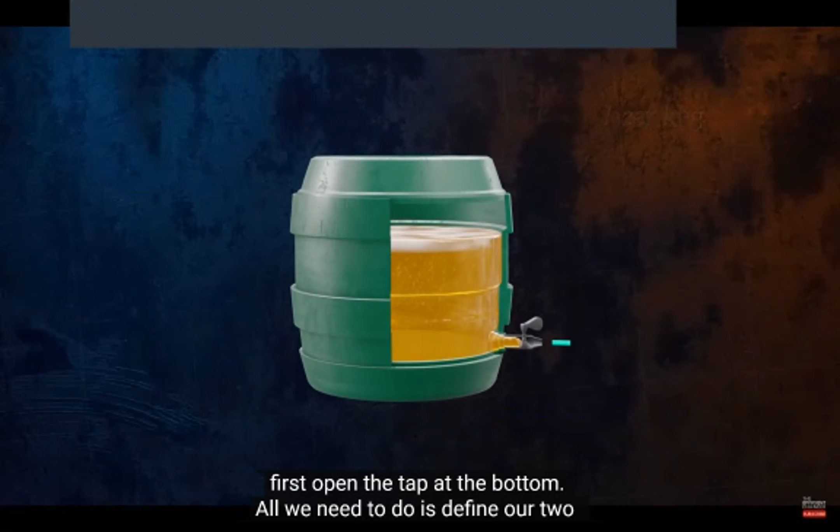Let's look at one more example where we can apply Bernoulli's equation. Say we have a beer keg, and we want to calculate how fast beer will drain when we first open the tap at the bottom. All we need to do is define our 2 points along a streamline and apply Bernoulli's equation.

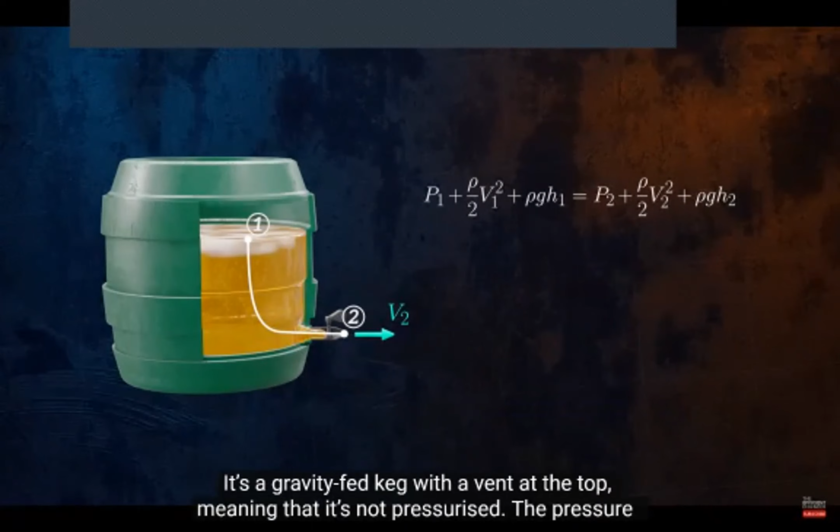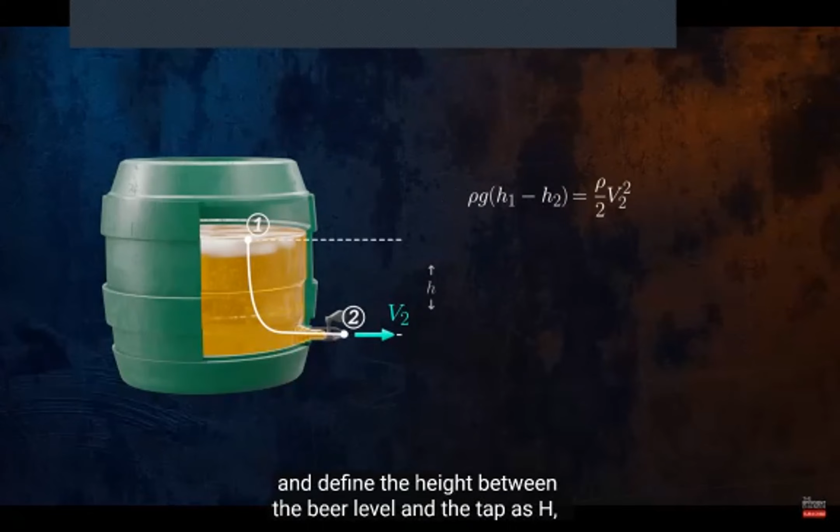It's a gravity-fed keg with a vent at the top, meaning that it's not pressurized. The pressure at both points will be atmospheric, and so the static pressure terms cancel each other out. We can also assume that the keg is large enough that the fluid velocity at point 1 is close to 0. If we rearrange Bernoulli's equation and define the height between the beer level and the tap as h, we get this equation for the beer velocity out of the tap.

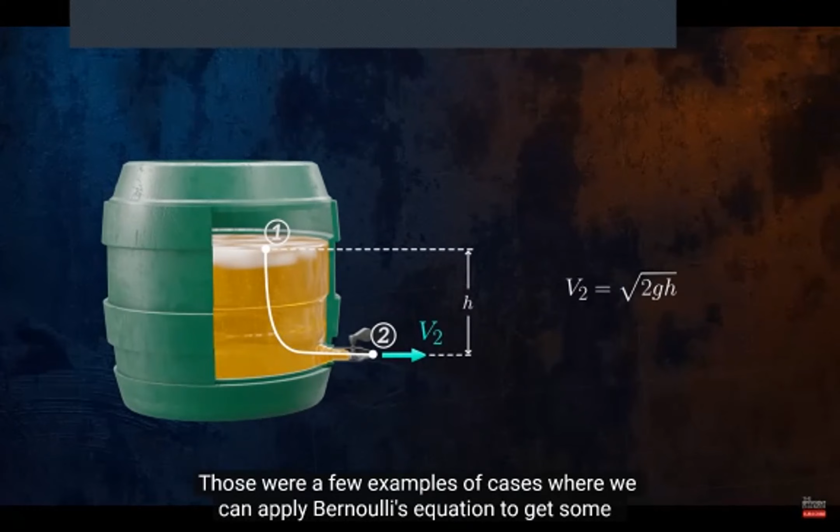Those were a few examples of cases where we can apply Bernoulli's equation to get some valuable information or to solve a problem. But to use it correctly, it's important to have an understanding of the limitations of the equation, which arise because of how it's derived.

There are several different ways Bernoulli's equation can be derived. It can be derived based on conservation of energy, by considering that the work done on the fluid increases its kinetic energy. Or it can be derived by applying Newton's second law, which involves determining the forces acting on a fluid particle and applying F equals ma.

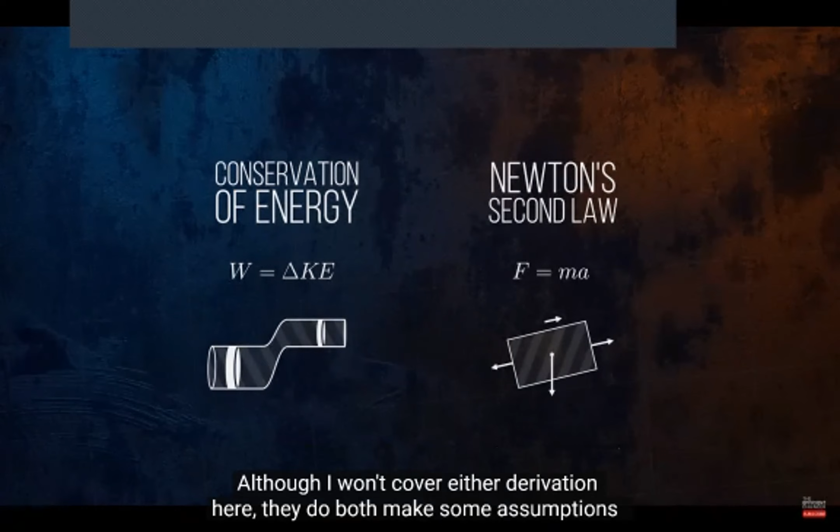Although I won't cover either derivation here, they do both make some assumptions that we need to be aware of, since they limit how we can apply the equation. Firstly, the derivation of Bernoulli's equation assumes that flow is laminar and that it is steady, meaning that it doesn't vary with time, like this. Next, it assumes that the flow is inviscid, meaning that shear forces due to fluid viscosity are negligible.

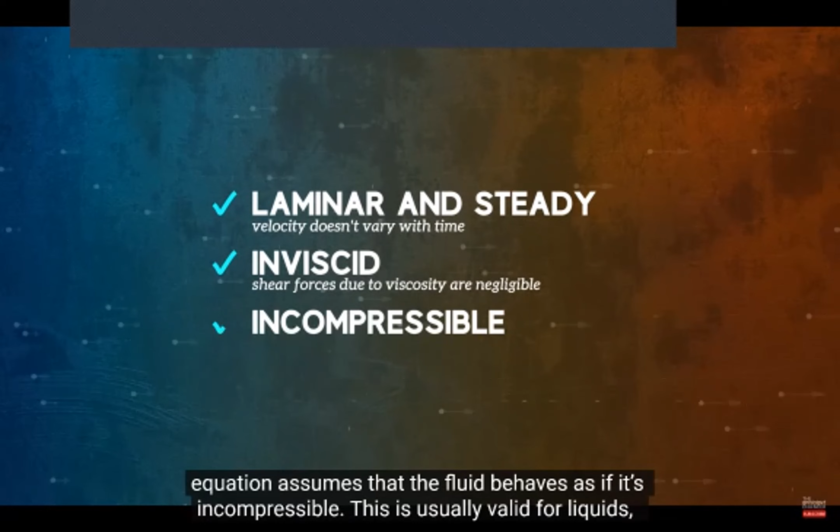This assumption is needed because viscosity would result in a dissipation of some of the fluid's internal energy, and so the idea that energy is conserved along a streamline would no longer apply. And finally, the derivation of Bernoulli's equation assumes that the fluid behaves as if it's incompressible. This is usually valid for liquids, but might not be for gases at high velocities. All three of these assumptions need to be valid if you want to apply Bernoulli's equation.

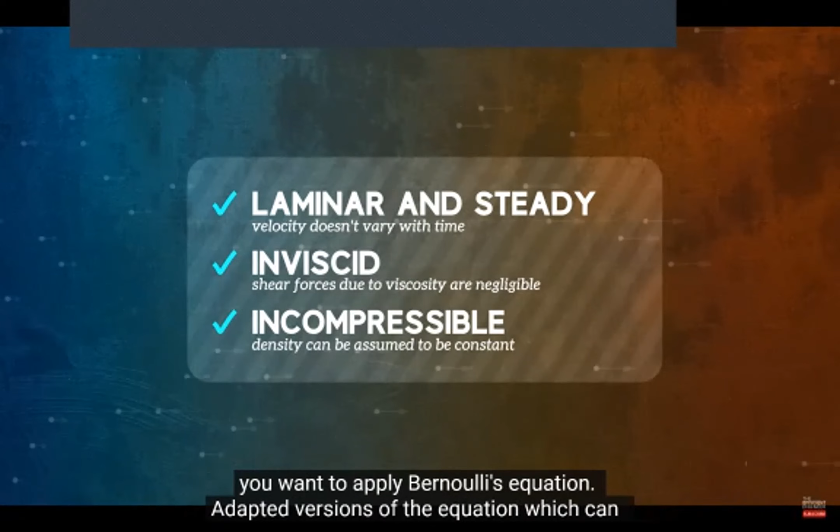Adapted versions of the equation which can be applied to unsteady and compressible flows do exist, although they're a bit more complicated.

Being able to recognize when Bernoulli's principle is at play, or when Bernoulli's equation can be applied to solve a problem, is a powerful tool in any engineer's arsenal.